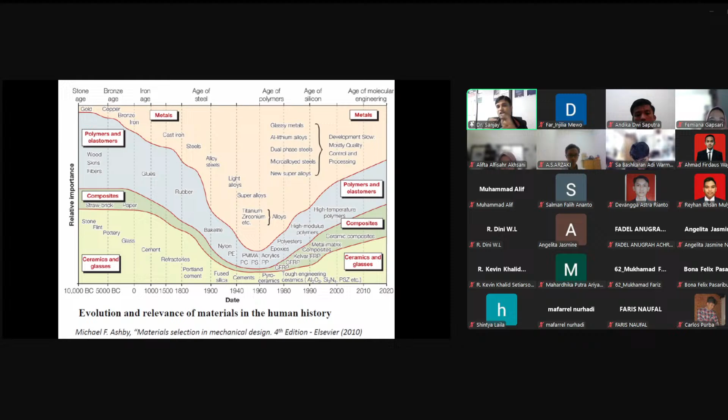In the ancient days, even in 10,000 BC, they were constructing homes using straw bricks, made from mud and straw. This is also a very old composite material which was already used in 10,000 BC.

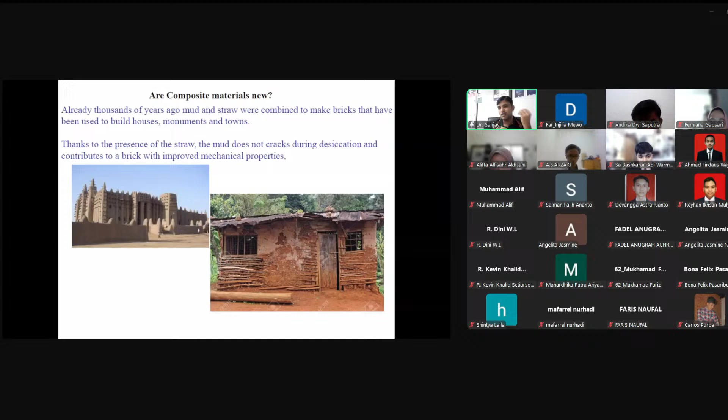Are composite materials new? We can conclude it's not new. The word composite itself is not new. But using high strength fibers to stiffen and strengthen cheap matrix material is probably older than the wheel. Now we are using different kinds of stiffened and strengthened fibers to improve composite materials for different applications.

Almost all natural materials of value, like wood, bone, and muscles, are composites. I have already mentioned these things. Also, the composite industry has been growing rapidly over the past 30 years in the area of fiber composites. Even myself and your professor Femi are working on fiber reinforced composites based on applications.

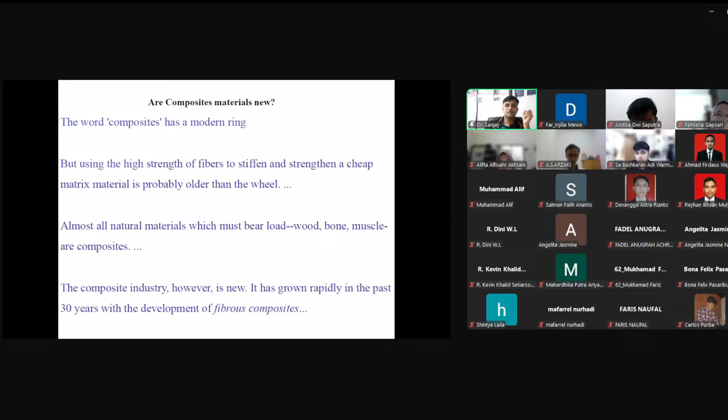Now we will go to different kinds of applications. As you're all bachelor students, I don't want to give more theory. Instead, you should understand the real applications -- that will be better for understanding the theory as well as the real nature.

For example, as I said, straw bricks and concrete are generally used for making houses, homes, or buildings. Our human body itself has many kinds of composite materials, and tires and most transportation components are made by composite material. Plywood for interior, exterior, and everything is also composite material, and even sports goods.

Now we will move to the evolution of materials, like the use of modern polymer composites. During World War II, most military applications related to aircraft were made by glass fiber reinforced composites. Glass fiber reinforced composite belongs to the fiber reinforced composites group, which belongs to the group of polymer composites.

In glass fiber reinforced composite, glass fiber is the reinforcement material and polymer is the matrix phase. When we combine glass fiber with polymer, it becomes a polymer composite.

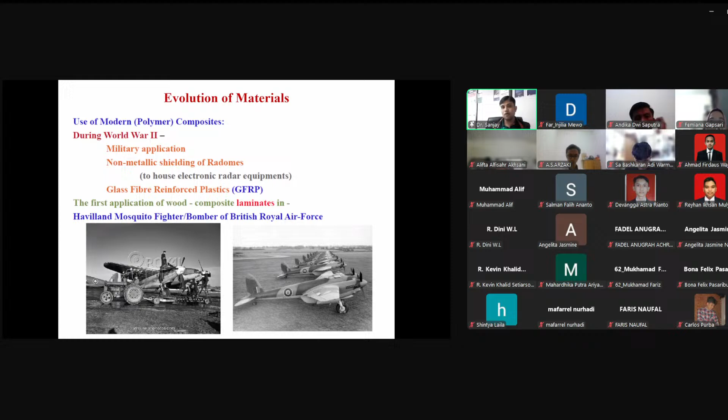Then they started using it in different kinds of flights, including those used in the attack on Pearl Harbor by the Japanese. During World War, most aircraft parts were made by polymer composite, and even nowadays most aircraft parts are still made by polymer composite materials.

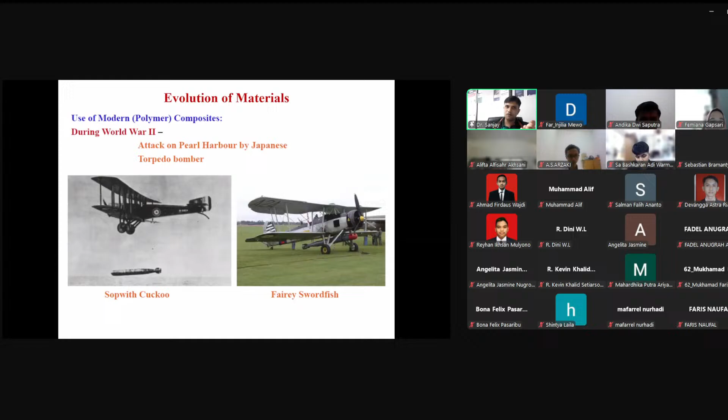Composites in ancient times, as I discussed already, include mud wall reinforcement with bamboo shoots. We can still see this nowadays in some museums, even in Indonesia, India, and Thailand. Most of our ancient homes were made by mud and bamboo, and bricks with straw.

The Israelites started using bricks reinforced with straw, and bitumen embedded with papyrus for boards, and powerful bows using wood, animal tendons, and silk composite. Swords used laminated steel and iron, showing the growth of composite materials. From 1909 to 1947, the US and UK utilized thermoset resins -- phenolics, polyesters, and epoxy -- for making aircraft and automotive applications.

In the 1940s, during World War II growth, they started using composite materials for structural applications. In 1940, the Spitfire composite aircraft was made by natural fiber with polymer composite in the UK, using flax fiber and phenolic. Then in 1942, they started to utilize glass fiber with polyester in the USA. In 1947, commercial glass fiber based CSM was introduced.

In the 1950s, fiber reinforced composites became a popular technology for boat hulls, car bodies, truck bodies, tanks, helmets, and the chemical industry. After 1950, fiber reinforced composites became very popular and started being utilized in many applications because, as I said, they are stronger and lighter.

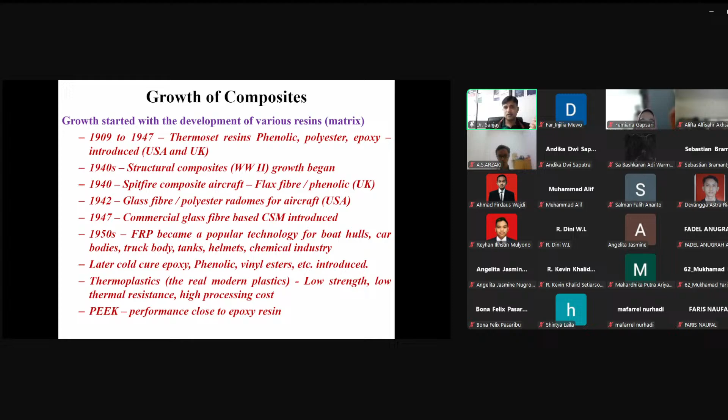Now let's move to the next topic and try to understand what are not composites. First, plastics - plastics are not composite materials, but common plastics are one of the thermoplastic polymers. Alloys are also not composite materials. Even metals are also not composite materials.

But if we blend plastic with some reinforcement, then it will become a composite. Similarly with alloys combined with some matrix material, then it becomes a composite. And again, metals with some matrix material becomes a composite material. This means these are all matrix phases and reinforcement phases - we need a matrix material to combine with them to make composite materials.

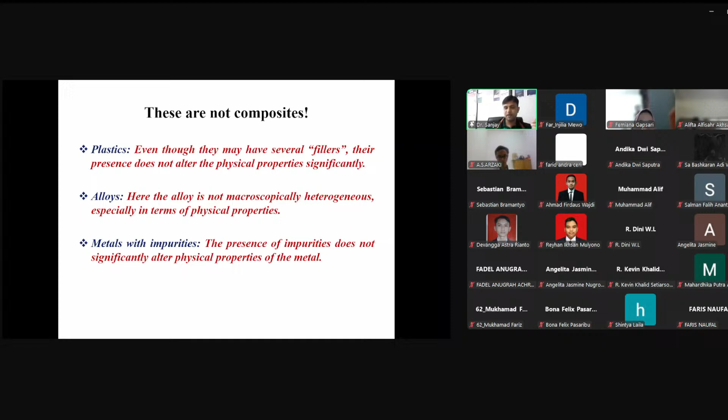What are some forms of composite materials? Generally, I'd say wood, because of cellulose fiber in lignin, plywood, concrete, fiberglass, carbon reinforced polymers, metal matrix composites, ceramic matrix composites, and Damascus steel.

Why would you want composites? I have generally discussed the definition, then moved to the application and history of composite materials. Now, why do we need composite material? I have already given some small hints.

Composite materials are very strong and stiff, yet very light in weight. So the ratios of strength to weight and stiffness to weight are several times greater than metals. For example, if you compare steel and aluminum, composite materials like polymer composites, ceramic composites, or metal matrix composites are much stronger and stiffer than these individual metals.

Fatigue properties are generally better than common engineering metals, and toughness is also often greater. Composites can be designed that do not corrode like steel - that's another advantage. Most composite materials are corrosion resistant, which is one more advantage when compared to metals.

It's possible to achieve a combination of properties not attained with individual materials like metals, ceramics, or polymers. If you take only metals, ceramics, and polymers, we will not get this much performance compared to composites.

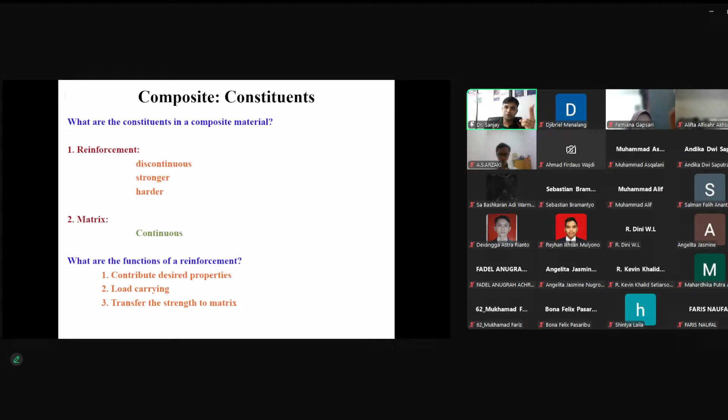What are the functions of matrix? As we discussed already, it will hold reinforcement together. Either reinforcement material is fibers, metals, ceramics, fillers or particulate, anything, it will hold with matrix and protect the fibers from environment and protect the fibers from abrasion. That is wear resistance. It helps to maintain the distribution of fibers inside the composite and distributes the loads evenly between fibers, and enhances some of the properties of the resulting material and structural component that fiber alone is not able to impart.

These are the main properties of matrix which are given to the composite material. Matrix material will give better finish for the final product. The fiber will not give the finishing structure; only matrix material will give the final structure.

Now we will move to classification of composite materials. Usually we have to give explanation from definition, classification, like that, but I have changed it a little bit. I go to the history, and I would like to talk about the natural composites, what is naturally available, those things.

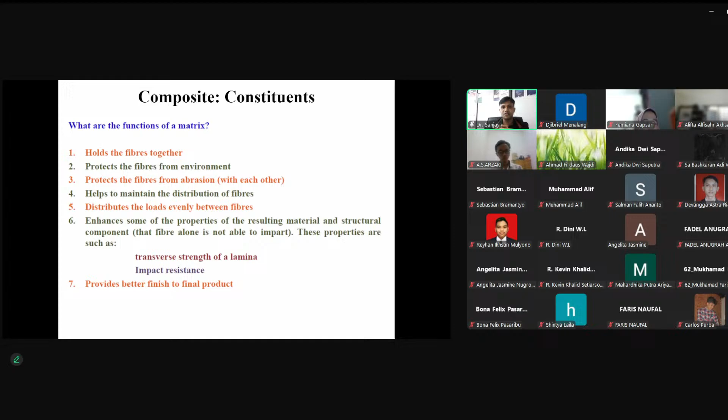And again, in the reinforcement, we will divide it into four parts: whisker reinforced, particulate reinforced, fiber reinforced, and structural reinforcement composites. But the important classifications of composite materials are based on matrix materials, like polymer matrix material, metal matrix material, ceramics matrix material. Those are the important categories of composite materials.

Again, in polymer composites, we will divide into two groups, that is thermoplastics and thermosets. It means based on the polymers. One is thermoplastic and thermosets, and even based on the metal matrix, different types of metal matrix and ceramics matrix. But metal matrix we will not divide again, but polymer matrix we will divide again into two parts: thermosets and thermoplastics.

And again, based on the reinforcement structure: if it is in the form of particle, then particle reinforced. If it is in the form of fiber, then it is fiber reinforced. If it is in the form of whisker, then it is whisker reinforced. If it is in a structure like laminate or sandwich, then it is structural reinforced composite. And in the polymers, we will use terms like particle reinforced polymer matrix composite, fiber reinforced polymer matrix composite. Such things will come.

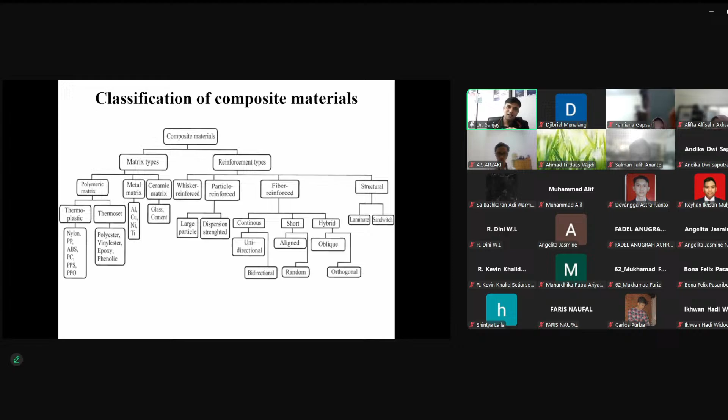And here it is laminate. Laminate means mat - the fibers or reinforcement material in the form of mat or fabric is called laminate composite. And flake also, based on the size, that is called flake. And filled composite: in filled composite we can fill fiber, particulate, flake - that is generally called filled composite.

And again, we can call it long fiber. Based on the fiber composite, we can divide it again as long fiber composite, short fiber composite, and even the particulate composite we can make like micro particle based composites, nanoparticle based composites, again like that.

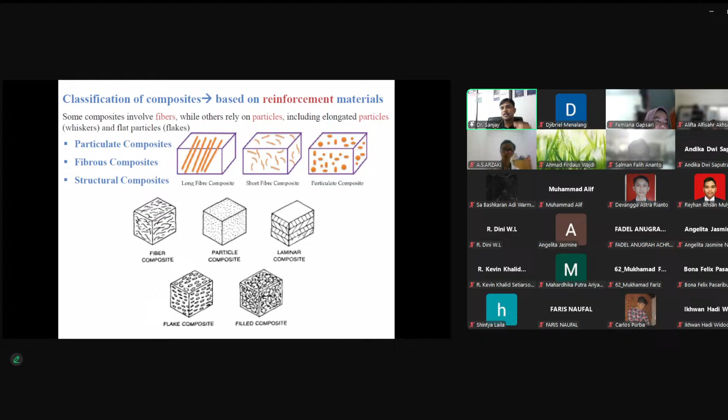And as I said already, the particle reinforced composites can have a random orientation of particles, or preferred orientation composite. We can divide based on the particle orientation, like the particle angle, 0-degree angle or 45-degree angle or 60-degree angle. What are the most common particle reinforced composites? It's like concrete - cement is also a particle reinforced composite. Or in terms of metals, if you use aluminium or aluminium oxide, metallic or non-metallic oxides, that is also a particulate reinforced composite. And even fibers in the form of fillers or particles also belong to particle reinforced composites.

Example of particle reinforced composites: paint and ink are particle reinforced composites. Also porcelain, electrical contacts, heat sinks, brake pads, electromagnetic sheets - these are all particulate reinforced composites. Even permanent magnets, correction fluids, cemented carbide, wear resistant aluminum belong to this category, based on the application and size of the particle used in the composite.

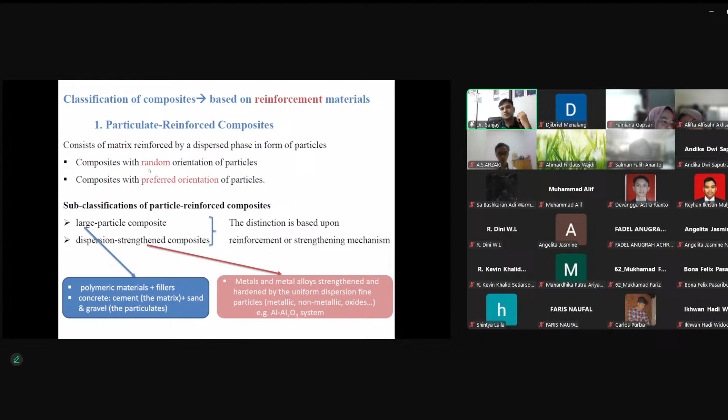Next, fiber reinforced composites. I work on natural fiber composites and synthetic fiber composites. Based on fibers, we divide into two categories: long fiber and short fiber. Again, we divide into continuous and aligned, or discontinuous and aligned. This is continuous and aligned fiber reinforced composite, and this one is discontinuous and aligned.

Here, the fibers are discontinuous but aligned, and this one is discontinuous and randomly oriented. Based on the application, we have to choose which type of composite and classification is suitable. We use short fibers or long fibers, and must think about what property we get with short fiber versus long fiber. In long fiber, there are unidirectional fibers, bidirectional fibers, which we call mats.

The structural composites are very clear - there are only two: laminate composites and sandwich structures. This is laminated reinforced composite, where fibers are aligned in directions like 0 degree, 90 degree, or 45 degree. This is our laminated stacking sequence, otherwise called laminated reinforced composites.

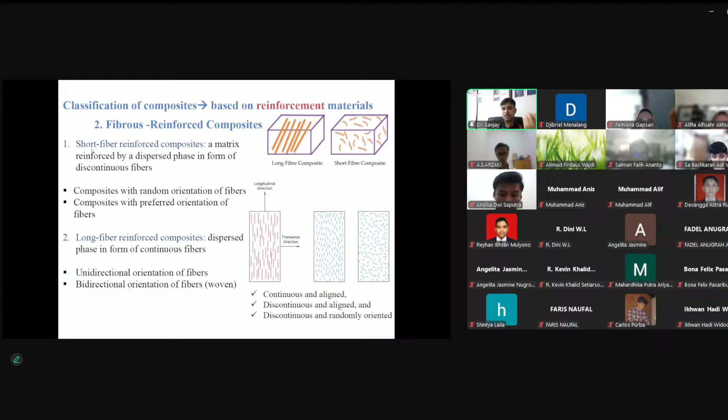These are all reinforcement materials, which we combine with matrix materials. Based on the orientation, we can increase the stiffness and strength of the composite. The strength and stiffness depends on the orientation of the fibers.

This one is sandwich composites. Even honeycombs can be used as a reinforcement material in the composite - we call it structural sandwich composites. I won't explain more on this; it belongs to masters and PhD level study, like why we need sandwich structures. We compete with steels and aluminum alloys - compared to these metals and materials, sandwich structures give high stiffness and strength to the structure.

That's the reason we use sandwich structures in many applications. We can use phenolics, epoxy, polyurethanes - different kinds of polymers - as reinforced matrix materials. Now we go to the main classification: metal matrix composites, ceramic matrix composites, polymer matrix composites.

For bachelor level, understand that metal matrix composite means the matrix material is a metal. Ceramic matrix composite has matrix material as ceramics. Polymer matrix composite has matrix material as polymers. That's easy to understand. In metal matrix composites, we use different metals like aluminum, magnesium, iron, cobalt, copper.

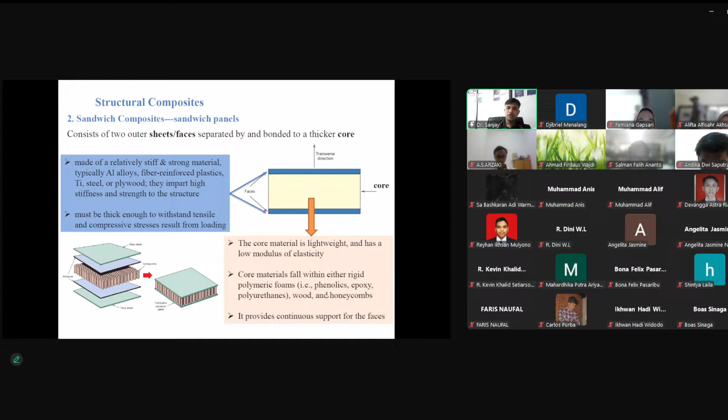But my class is on polymer matrix composites. So the matrix material is polymers, and we know polymers are divided into two categories: thermoset and thermoplastic. Thermosets are typically polyester and epoxy - very familiar thermoset polymers. Thermoplastics include PVC (polyvinyl chloride), nylon, polystyrene, and polyethylene - these are popular thermoplastics. Even rubber is a polymer, an elastomer.

I will move this one.

Compared to metal matrix composites and ceramic matrix composites, polymer matrix composites are very popular due to their low cost, simple fabrication methods, and lightweight nature compared to ceramic and metal matrix materials.

The reinforcement materials in polymer matrix composites are usually fibers, either synthetic, natural, or hybrid fibers. They can be divided into continuous or discontinuous fibers, or classified based on fiber orientation.

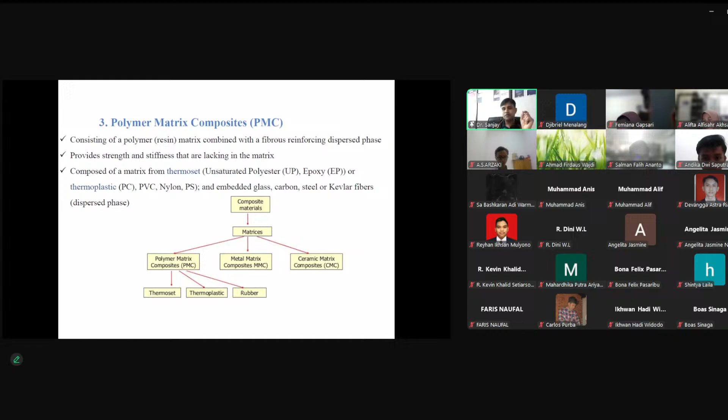What are the desired properties of polymer matrix composites? Why are they so popular for many applications? First, high strength, high tensile strength. Next, high stiffness. Next, high fracture toughness. And next, good abrasion resistance and good corrosion resistance.

Compared to metals and ceramics, polymers are cheaper. So applications prepared using polymer matrix composites have high strength, high stiffness, high fracture toughness, good abrasion resistance, good corrosion resistance, and low cost.

According to the reinforcement material, there are many types of fibers used, either natural or synthetic. Most commonly used synthetic fibers are e-glass fibers, carbon fibers, and Kevlar or aramid fibers. Many natural fibers are used in applications like sisal, jute, bamboo, and banana fibers, the most commonly available natural fibers.

Synthetic fibers are man-made fibers. Even the polymer itself is a man-made fiber. Fiberglass and polyesters are some examples of synthetic fibers. The most commonly used synthetic fibers are e-glass, carbon, and Kevlar.

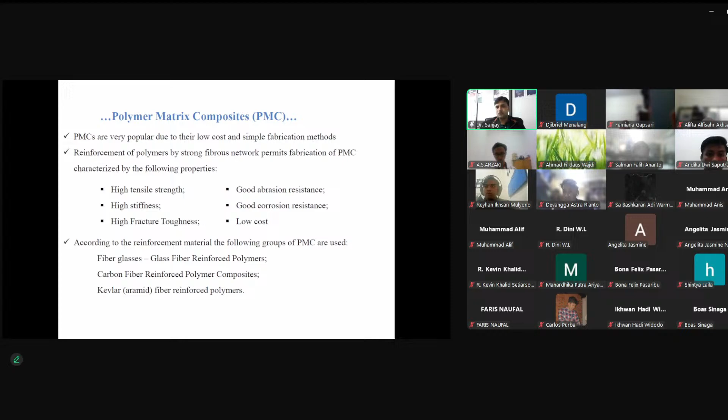For example, glass fiber and carbon fiber reinforced polymer matrix composites. In this composite, there are two reinforcement materials: glass fiber and carbon fiber. Why carbon fiber? It is stronger and stiffer than glass, but more expensive. Glass fiber is less expensive than carbon fiber, but lesser in stiffness and strength. If you mix this combination, it gives stronger and tougher material.

We can also balance the cost, and we will get high impact resistance. This includes continuous fiber, discontinuous fiber, whisker, particles, and fiber brand types.

As you're all mechanical students, now we will discuss the mechanical behavior of composite materials. I said already, traditionally composite materials are homogeneous, but if we mix with another material, it becomes heterogeneous.

Composite materials combine two distinct properties to increase strength and stiffness. In terms of mechanical behavior, we can say it increases lightweight properties, density, internal structure, tensile strength, modulus, elongation, and impact. These are the considerations on mechanical behavior of composite materials.

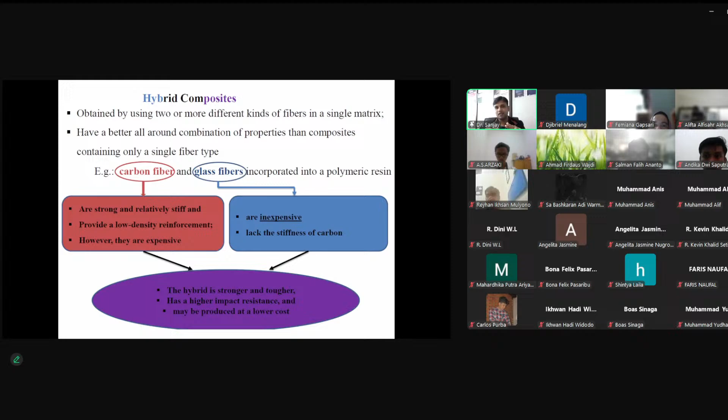Advantages of composite materials: as I said, composites are engineering materials. We can engineer them specially to meet our needs on a case-to-case basis based on the application. In general, the following properties can be improved by using composite materials.

These include strength, modulus, weight, electrical conductivity, thermal conductivity, fatigue behavior at extreme temperatures, acoustic insulation, vibration damping, aesthetics, resistance to wear, and resistance to corrosion. I hope you understand why we are using composites and what the advantages of composites are.

The limitation is, first, it's anisotropic and non-homogeneous. But no need to think about the limitations of composites too much; we should always think about the advantages of composite materials. Generally, composite materials are costly, sometimes difficult to fabricate, and sensitive to temperature. Some polymer composites also show moisture effects. So those are the limitations for composite materials.

What are the applications of composite materials? Already I discussed that there is no field of engineering without the footprint of composite material in some form. This means if you consider any field of engineering, definitely in one way or another, composites are there in many applications.

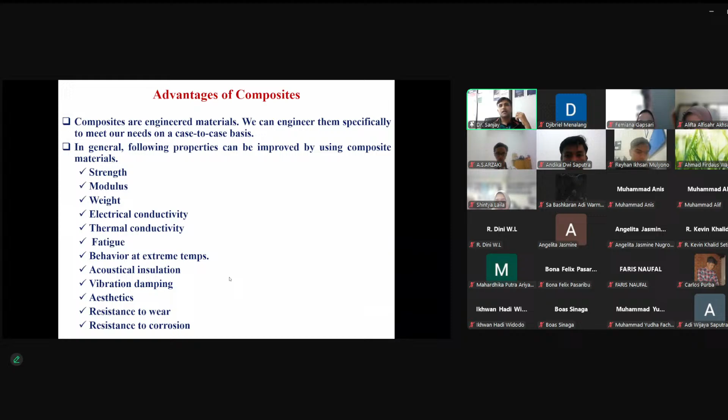What are the composites which we are using in automotive and automobile applications? Like chassis components, body components - interior and exterior components of automotives made by composite materials, and engine components. Mainly these three parts are made by composites in automotive and automobile applications.

And why we are using composites? Because of high specific strength, low wear and tear, attractive styling. It gives better finishing, high resistance to damage, high resistance to corrosion, high thermal insulation and sound retaining properties, easy repairing and maintenance, and free structural elements.

What are the materials used in automotive applications? What are the different kinds of composites we are using in automobile applications? Most automotive and aerospace applications use glass fiber reinforced composite or carbon fiber reinforced composites, like E-glass fiber reinforced composite sheet molding components.

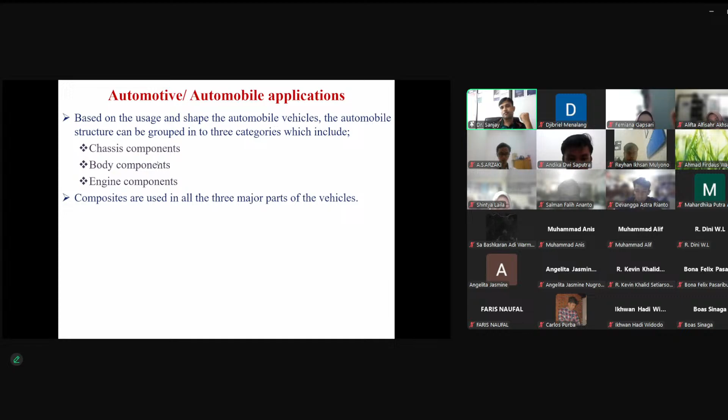Composites are used in hood and door panels of automotives, radiator supports, bumper beams, roof frames, door frames, engine valve covers, timing chain covers, oil pans, and even E-glass is used in place of multi-leaf steel springs. Glass reinforced composites are used in bus bodies, roof panels of bodies, engine bonnets, tailgates, mud wings, bumper bars, and window frames.

This means most of the parts are made by composite material, especially from polymer composites, fiber reinforced composites. Even petrol tankers, chemical tankers, and milk tankers are made by composite materials.

In the railway, it is like wash basins, battery boxes, seats, backrests, bathroom cubicles, window frames, guides, undercarriage, water tanks, vacuum reservoirs. You can see, if you look in your own room, you can find many kinds of composite materials. Even our laptop is made of composite material, made by polymer reinforced composites.

Processing techniques - the most famous processing technique for automotive and automobile applications is hand layup technique and compression molding technique. These two are the very simple and most popular processing techniques for making automotive and automobile applications.

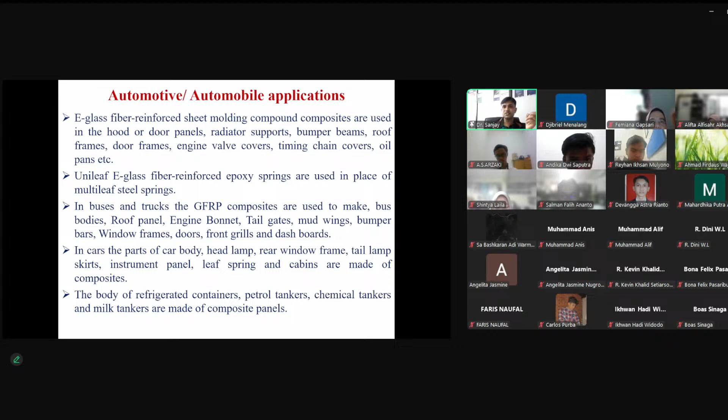Next, in aircraft and military applications, historically in the World War itself, people started to use polymer composites or fiber reinforced composites in aircraft. After that, scientists started to use it in rockets, missiles, and spacecrafts.

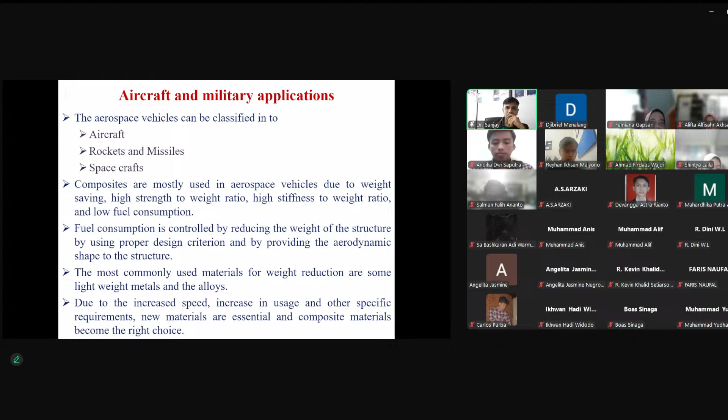In space applications also, many different types of composite materials are used based on the requirement. Either they can use metal matrix composites, ceramic matrix composites, or polymer matrix composites. Sometimes for the body they use polymer composites; for some temperature-oriented components they use ceramic matrix composites.

Even in electrical and electronic applications, like PCBs (printed circuit boards) and casings of electronic equipment, are mostly made by fiber reinforced composite, with glass fiber reinforced components. Glass fiber reinforced composites are transparent to electromagnetic and sonar signals. That means many electrical and electronic components are made by glass fiber reinforced polymer composite.

Some applications of composites in the electrical sector include AC motors, starters, transformers, fuse blocks, cable ducts, switch actuators, electrical separators, activator cases, and low and high tension insulators. Printed circuit boards (PCB) are the most commonly used composite application in electrical applications.

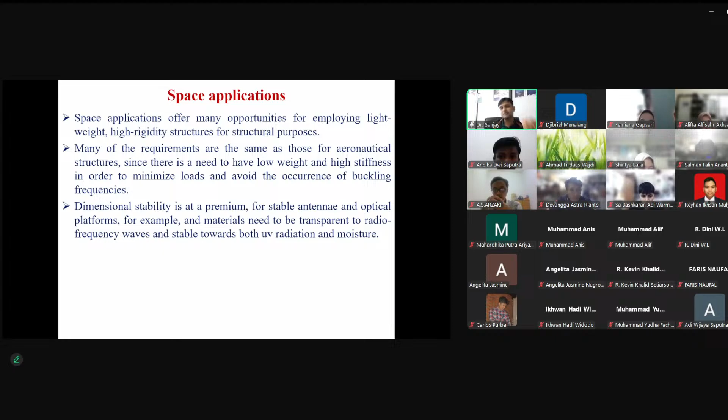Nowadays they've started to use other fibers also, like Kevlar 49, for making boat hulls, decks, bulkheads, frames, masts, and spars. Carbon fiber reinforced composites are used for racing boats. These are some of the composite applications in the marine sector.